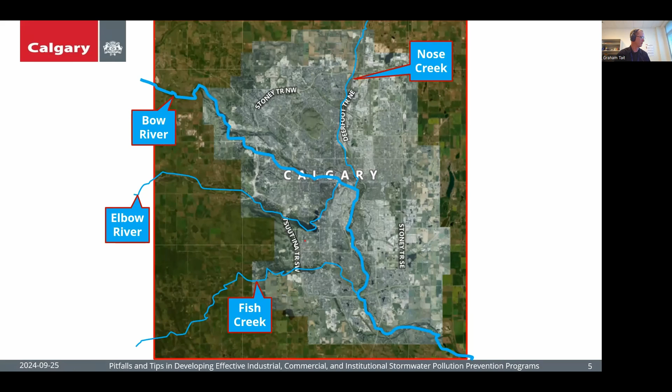We have a couple of water treatment plants. Some of you might have heard on the news that we had a huge problem here in Calgary over the summer. The big feeder main, a big water pipe that's kind of like a big artery transporting our drinking water from the plant up here in the north called Bearspaw, had a catastrophic failure. It supplies about 60% plus of our drinking water to Calgarians, as well as outlying communities.

Including the Tsuut'ina Nation down in the southwest part of the city. People really learned this summer about sustainability and how water as a resource, whether drinking water, wastewater or stormwater, is facing a lot of issues we need to think about in terms of sustainability. We used to have two, but now have a third wastewater treatment plant located along the Bow River.

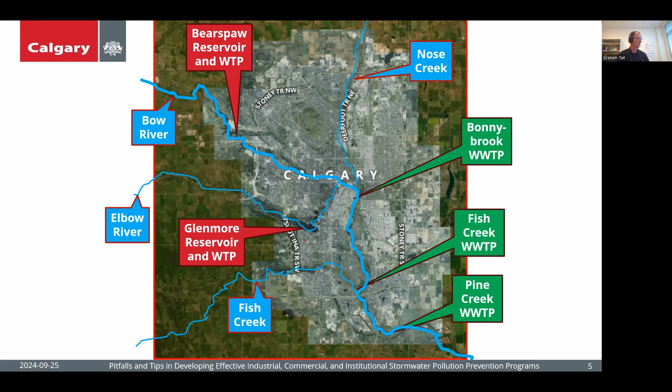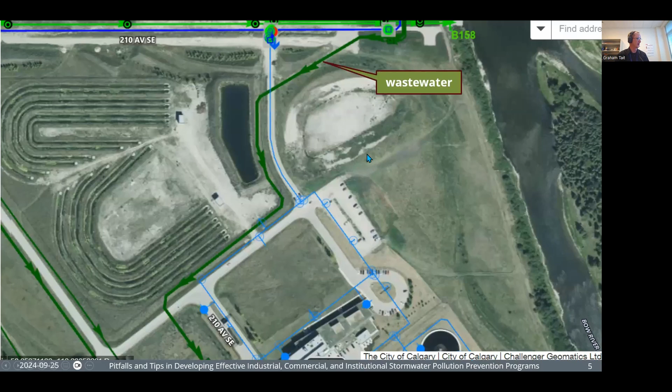This aerial image shows a little part of the north end of the Pine Creek wastewater treatment plant, which is the newest one. It's got some neat stormwater low impact development stuff like green roofs. The colored lines here I've labeled—the darker green line is a wastewater main, the big trunk that comes down into the wastewater treatment plant.

Interestingly, when this plant was built a few years ago, the City of Calgary partnered with the University of Calgary, and there's a really interesting research facility here doing a lot of research and publishing papers on things like pharmaceuticals in drinking water and wastewater. These contour-like areas you see are actually testing streams where they can look at the fate of a pharmaceutical, for instance, in wastewater. It's really interesting what's going on down there.

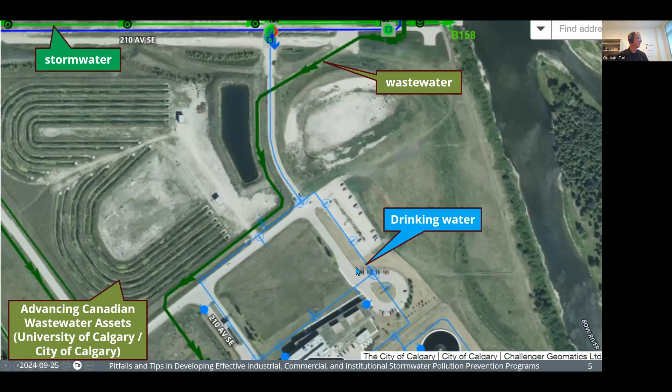This is from our geographic information system, our GIS, these layers. The blue layer is our drinking water—those are pipes and valves and so on. The lighter green color is stormwater. A lot of that stormwater flows sometimes with some degree of treatment, like a storm pond in newer neighborhoods, but in a lot of older areas it drains untreated largely to the receiving environment—in this case, the Bow River, where this wastewater treatment plant is located. But that's just an example. As the water utility, those are the three different types of water we're responsible for managing.

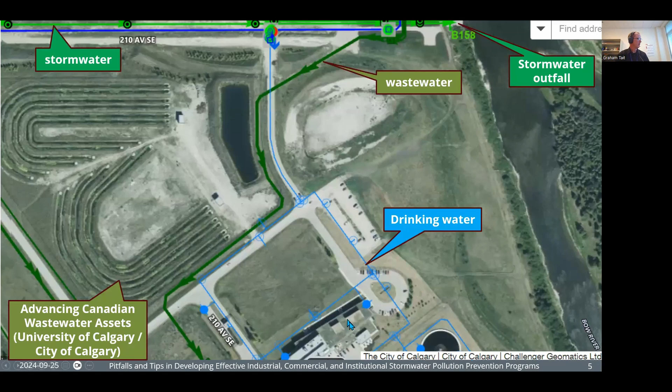In a bigger watershed context, Calgary is located along the Bow River, which flows from the eastern slopes of the Rockies. North of us, about 3 hours drive, is Edmonton, with a river called the North Saskatchewan. The Bow River combines with the Oldman River and becomes the South Saskatchewan, flowing through Saskatoon. It's important to think about stormwater pollution prevention knowing we're always living upstream of our neighbors and downstream of our neighbors—so a regional effort at a watershed scale is sometimes important.

I'm going to talk today a little bit about our stormwater pollution prevention team. As I mentioned, we provide various lines of service, including erosion sediment control. I'm going to be talking mostly about our ICI program today.

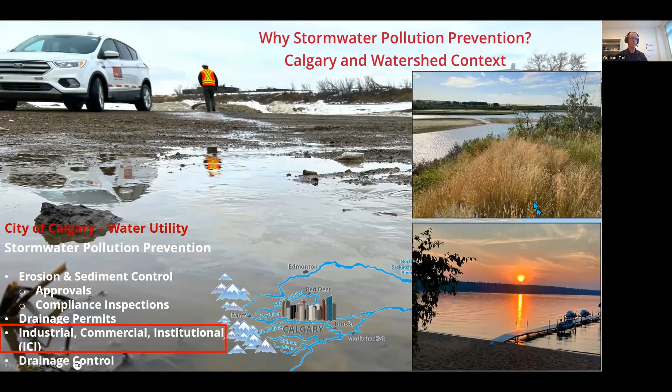Just for our friends in Saskatoon joining us, I wanted to post a couple of pictures. My wife's side of the family is from the Prince Albert area, so we go out to this beautiful lake every summer called Emma Lake, a couple hours north of Saskatoon. I did take my bike this summer and ride around the beautiful pathways in Saskatoon, and this is a view of the South Saskatchewan River as it flows through the city. It's just gorgeous. So there you go, Saskatoon folks, I thought I would make mention there.

Stormwater awareness, I think that's why we're all here. It's really important, and as Joe, one of the presenters, mentioned yesterday, it's really where we've seen some good strides in terms of sustainability.

I'm currently doing a course in environmental communication, and I've been reading this book by Hoggan called Do the Right Thing: PR Tips for a Skeptical Public, produced by Capital Books. Hoggan's website is here. It's a really interesting read if you're working in stormwater pollution prevention and trying to plan how to work effectively with industries, facilities, and colleagues in a municipality. What's key in our program is that first and foremost, the City of Calgary is doing the right thing, and secondary to that is being seen to do the right thing, in terms of having an effective program. That's my first tip of the day.

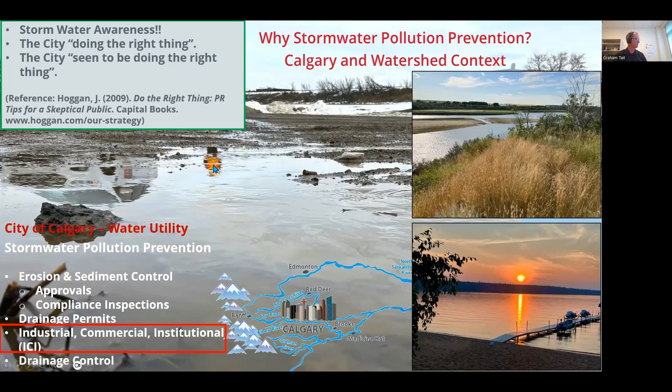The city here in Calgary, we're in part of a zone we call Hailstorm Alley. We suffer from a lot of bad hailstorms here, usually once every year or two, where one region of the city or sometimes a larger area gets hit. We had one just last month in early August, and it caused a lot of damage.

Currently, the price tag is about $2.8 billion. I'm not sure what that is in US dollars, but it's probably about 2.2 billion US dollars just for one storm that lasted for about an hour. It roared through the city and took siding off of homes and caused a lot of vehicle damage.

And once all the hail started melting, the Jasper wildfire you probably heard about too, north of Banff, north of Bow Lake is the town of Jasper, and it was partially devastated. About a third of the town was burned in a wildfire this summer. It was just awful to see.

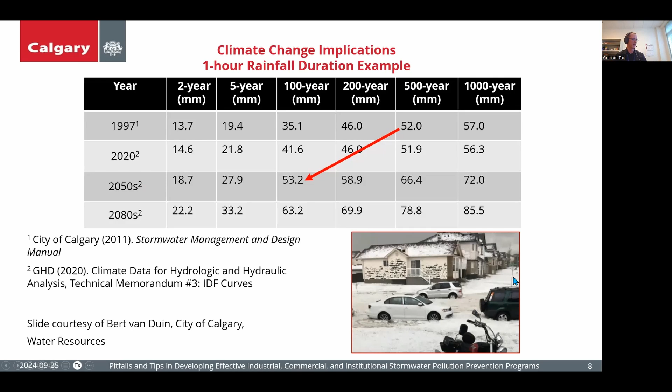So it's something we've been trying to consider in terms of our stormwater pollution prevention, our ICI work, and our erosion sediment control. We had a city group here in Calgary recently at the facility I work at - they did a climate adaptation and resiliency assessment, and the discussion about stormwater in that assessment was almost missed. Luckily, somebody said, 'Hey, what about stormwater?'

And you're getting more pollutants building up in these droughty periods, more intense rain events, and there's a lot more potential for pollutants, sediments, nutrients, and so on to be carried off into the stormwater system and downstream.

So in terms of regulations, we're really not all that dissimilar from the United States, for example, and I'm not sure where everybody on the call is calling in from today. But over the years, I've become quite familiar with the US requirements, starting with the Clean Water Act and the permitting and on down through the state and local level.

Here in the City of Calgary, we actually have an approval and authorization that's granted from our provincial government. The government of Alberta, which is our provincial government, has provincial legislation called the Environmental Protection and Enhancement Act. Since they basically oversee municipalities under their legislation, we have an approval to operate our stormwater system, our wastewater system in the city.

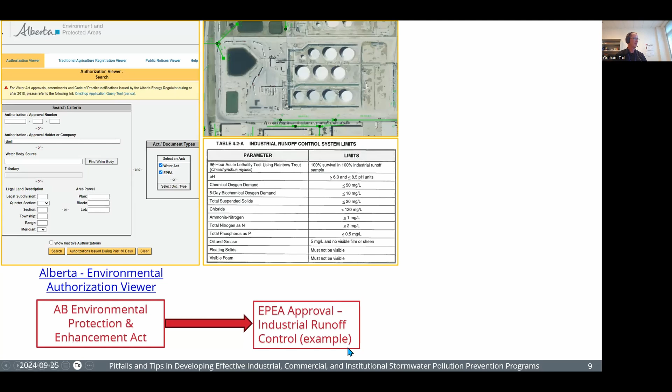We work closely with that facility and the Alberta government, but these tend to be few and far between—the vast majority of facilities do not fall under an approval, which creates a bit of a gap. One thing we've tried to do in our program is work effectively, especially with our provincial regulators, called Alberta Environment and Protected Areas.

Here's an example, a couple of photos I've added. The one at the top is where we did a joint inspection with Alberta Environment and Protected Areas at a local auto recycling facility. We were having a few problems with this facility at the time, and they've since done significant work to remove potential stormwater pollutants from getting into the storm system. At the time, they were draining all their vehicle fluids into an open tank under this car, which was a fire hazard and a real risk of pollutants being spilled and running off the site.

So we've done quite a bit of work on joint inspections with those regulators. They also have what's called the environmental hotline—a 1-800 number you can call. I call it a lot; I think they know me on a first name basis. You can report spills and that gets it into their system. They also have reporting if it's going into fish habitat, for instance.

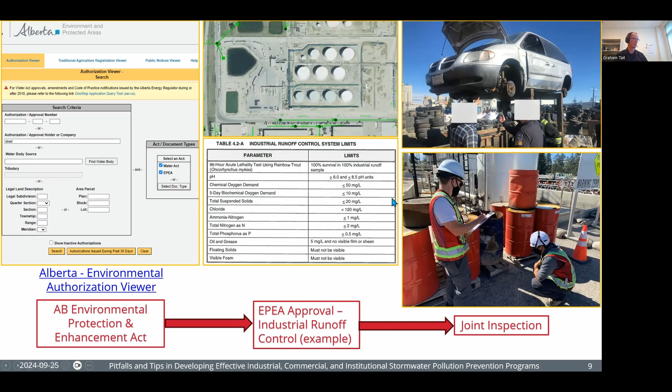They will notify the federal regulators, typically Fisheries and Oceans Canada or Environment and Climate Change Canada. They're fairly short-staffed here in the Calgary area, but we've worked with them on some joint work, so relations generally go pretty well. But I wanted to point out the difference between a guidelines-type approach and the sometimes need for standards or limits—that's a challenge we have here in Calgary, as regulators provincially and federally tend to take more of an end-of-pipe viewpoint, where it's entering the environment, which is where they're most interested.

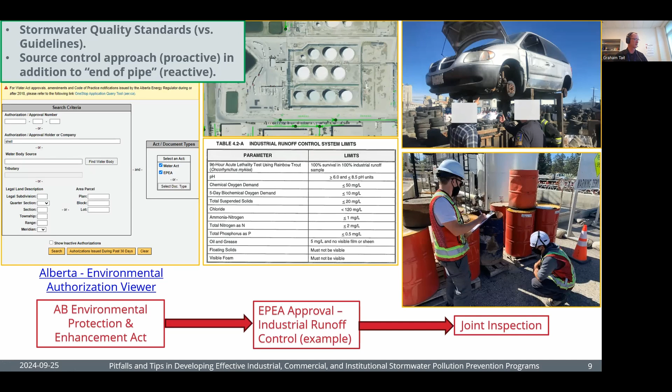So last year we finally released a strategy called the Stormwater Management Strategy, which addresses some of these issues and takes a more holistic approach to stormwater management in the Calgary area. Since this is over Zoom and turning into a YouTube video, you probably won't be able to click the link, but you can search up City of Calgary Stormwater Management Strategy. It's quite holistic, well integrated, and at the corporate level—it's not just the water utility responsible for it, we work with a number of business units and departments to implement the strategy.

Interestingly, one thing in the strategy over the next couple of years is that we're going to start requiring certain facilities or sectors to develop stormwater pollution prevention plans in the industrial and commercial world. Currently we're quite effective at that in the construction world with erosion and sediment control, but we've got a long way to go, so that's something we're currently working on, which is quite exciting. We do have a bylaw—some of you would call it an ordinance, I believe.

One of our bylaws here is the stormwater bylaw, and it gets updated every few years. We do have some wording in the bylaw, for example, that talks about the term we use as prohibited substance or prohibited substances. So anything other than relatively clean stormwater, if it conveys anything else from a site, such as high TSS, heavy metals, or hydrocarbons, we can take enforcement action under our stormwater bylaw.

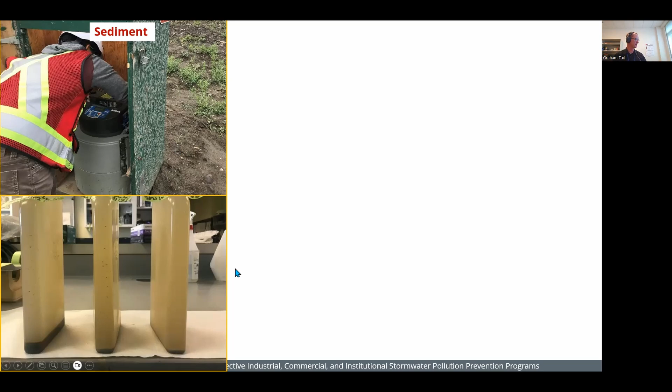So that kind of work was really effective at getting the message out.

A few years ago, if you see the photo in the top center, this is one of our oldest storm ponds in the city. It's one of these old traditional single-cell storm ponds. Somebody from our operations team called and said the pond had turned bright orange. I'm not sure how well the color shows up on your screen, but literally this pond is bright orange. There's a sign I've whited out here, an outfall sign that just shows the number of the stormwater outfall. We'll talk a little bit about that later.

We ended up having to take this water and test it quickly for toxicity to send it to one of our wastewater treatment plants as an emergency. It passed for toxicity, but we definitely didn't want this water draining out of the pond into the environment. After much work going up the branch network of the stormwater system, we determined there was a metal plating business with all kinds of lack of best practices, hidden drains under tanks and so on. Lo and behold, they had a discharge of acids and heavy metals—a lot of chromium and nickel in this water. So it was a bit of a disaster, and we did the best we could to get it under control.

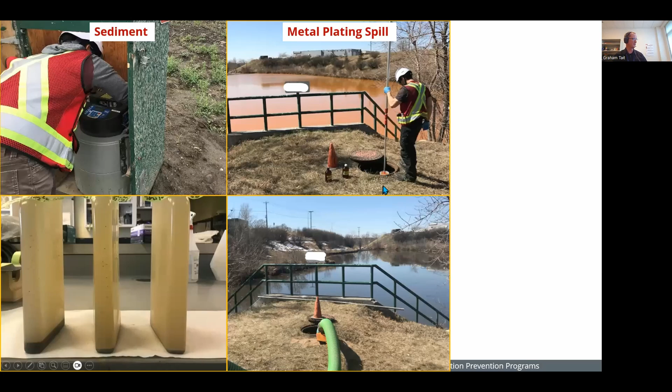If you join our session on Friday, there's a colleague joining me, Reed, who's going to talk a little bit about microplastics.

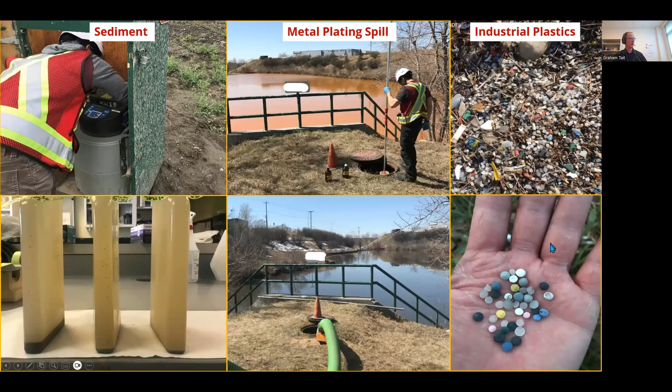Some of you in big urban areas have probably seen these plastics, especially if you have what Calgary does—a plastics industry, with companies that take fossil fuels and turn them into polyethylene pellets and resins, part of the linear production chain of making plastics. If you look at these little microplastic pellets—I think the Aussies call them nurdles—they really easily get into the stormwater system. They're like little ball bearings that float and bounce along in the stormwater.

And lo and behold, they end up downstream. This is an example near an outfall that's literally inundated—you can see all these multicolored microplastics. We had a huge problem with that. All these examples are pretty good visual examples of stormwater pollutants, but of course there are also a lot of invisible pollutants, dissolved metals, and other constituents that can get into stormwater. These are nice to show on a presentation, but raising awareness about stormwater, and what all of you are doing this week, is really important, as well as wet weather inspection, getting sampling incorporated into facilities, and making sure they have best practices.

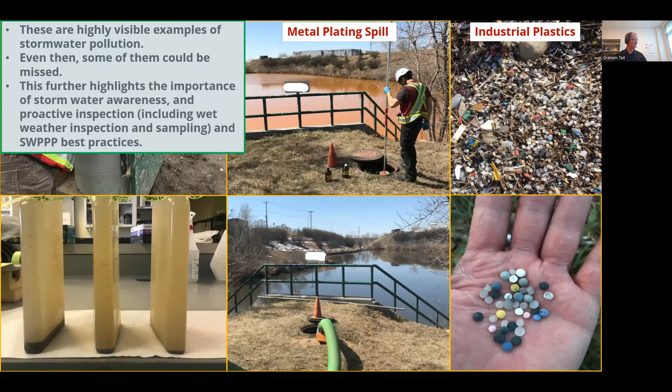The good news with that industrial plastics example—at the end of the slide, this is what it used to look like. We went upstream and discovered plastics manufacturing facilities with a lack of any kind of practices whatsoever. You can see the photo at the top left, for example, the middle of the railroad tracks coming into the facility is absolutely covered in plastic pellets. Some of the other photos demonstrate the same thing.

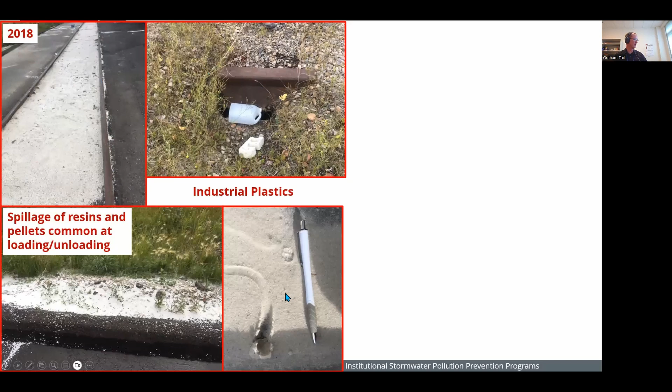So we brought it to the attention of these companies and told them they were going to be fined under our stormwater bylaw. We also got provincial and federal regulators involved, and they have some pretty large fines—you could be talking $1 million plus a day for these microplastics getting downstream. The companies quickly got on board, and as it stands today, they've got some of the best stormwater pollution prevention practices of any facilities around the city.

I put a couple of slides here on the right-hand side from 2023, from some inspection work last year around rail cars, showing good signage and good cleanup. There's also a local, provincial nonprofit called the Alberta Plastics Recycling Association that stepped in and was really helpful. They had ownership at the time of a program called Operation Clean Sweep, which some of you might have heard of—it's a worldwide program used in a lot of developed countries to deal with plastics pollution.

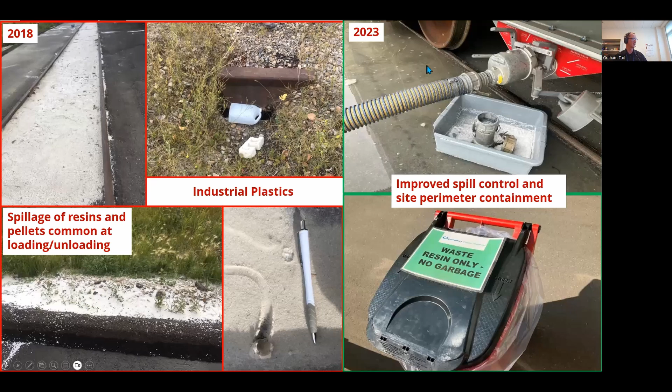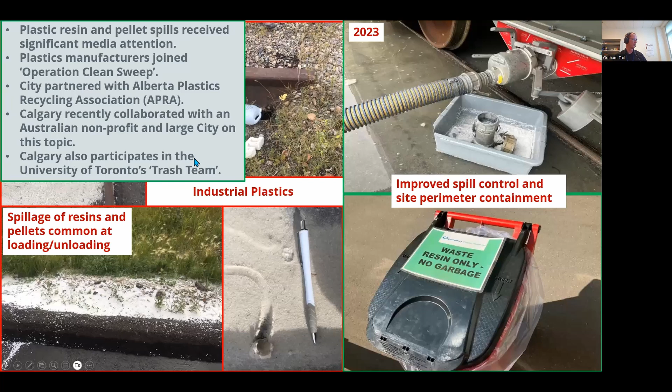We also did some work last year with a large city in Australia, as well as a microplastics pollution nonprofit there. One of the researchers got a hold of us. It just goes to show that we've all got similar problems, and when we work together, we can really make a difference.

We also do quite a bit of work here at our city facilities. The example in the photo is a bin used for hazardous waste disposal from some of our fleet maintenance facilities, as well as the fire department and other field groups that go out and do spill cleanup, for example a bus or garbage truck with a hydraulic fluid spill. The material is bagged and brought to this bin for hazardous waste disposal.

I don't have a photo of the old bin, but it used to be a little scary. It had large, heavy plastic lids, and 90% of the time the lids would be open. So when we had rainfall or snowfall, water would accumulate in the bottom, and if the bin wasn't completely watertight, it would leak out with all the other contaminants.

So we did quite a bit of work and discussion, a relatively low cost thing in the grand scheme of things, to replace this bin. I love this bin now. It's got great signage and a soft close lid. I wanted to open the lid to take a photo, but the lids are always closed now. So you've removed a source of stormwater pollution getting into the bin.

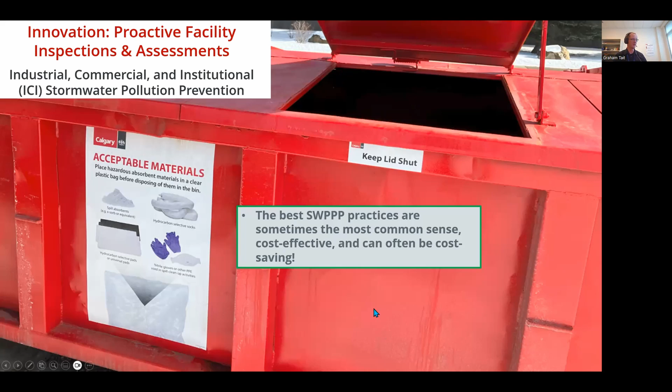In part thanks to the US EPA, we found some great information as we were trying to develop our content here at the City of Calgary for our ICI program. A lot of these concepts, like keeping a tidy site and minimizing exposure, are taken from ideas from the US EPA and even state and local level presentations like the ones you see this week. There's really a lot of good messaging on that.

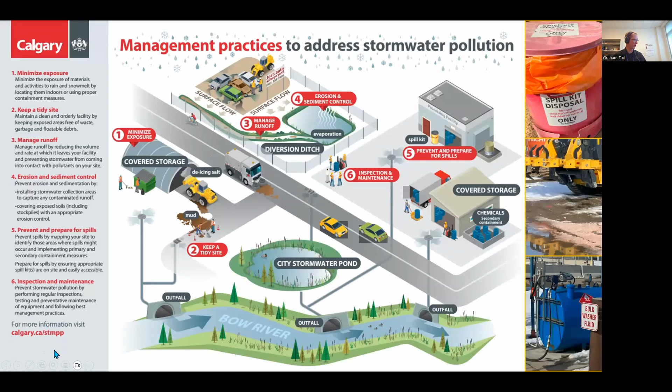And as the old saying goes, a picture says 1,000 words. So we prepared this and put it on our website, which I've got a link to a little bit later. There's a QR code you can click on, or also calgary.ca/STMPP, Stormwater Pollution Prevention. We just wanted to do something different.

So thanks to the US EPA and to all of you really for delivering stormwater awareness to such diverse audiences as we deal with.

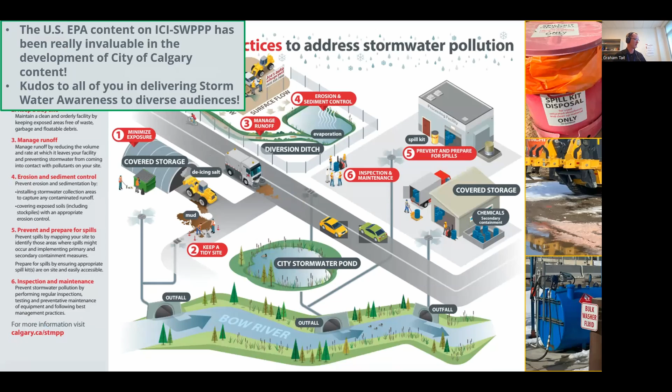Also a special thanks to Jonah Sonner - I really love this presentation, just give a little plug for it. It's back from 2016, so a few years ago, I'm not sure if there's an updated one, but I actually heard about this Stormwater Awareness Week through my friend John McCullough in California, and I started signing up for these sessions as much as I could every year. It's a small world, and it's really cool to connect with all of you.

I took some of the concepts Jonah explains in his video from 2016 and applied them to one of our local facilities just next door to me here. They built a new facility a few years ago called our salt management facility. Calgary's a winter city, and we use a lot of salt, though we try to be fairly judicious in how we use it.

Nonetheless, it's one of these balancing acts between public safety, driver safety, and stormwater pollution prevention. In fact, this facility used to make a product they would store outside that used to drive me crazy, called pickle - it's basically a pickled sort of gravel material, pickled with about 10% salt.

A lot of the material they use on the roads is what we'd call pea gravel, a small gravel about the size of green peas, maybe a bit smaller. In order to stop the piles freezing and to have salt in the product as a snow and ice control material, they add salt, and they used to store it all outdoors.

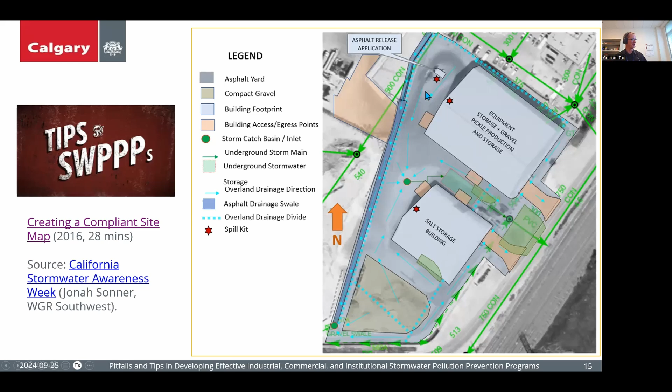Like I said, I love the video by Jonah Sonner, mapping your site and creating a compliant site map. We take quite a bit of this, as well as some of the US EPA stuff. Now we have a tool on our website where people can create their own site map and build it into a SWPPP, basically. How are we doing for time?

I better speed up here.

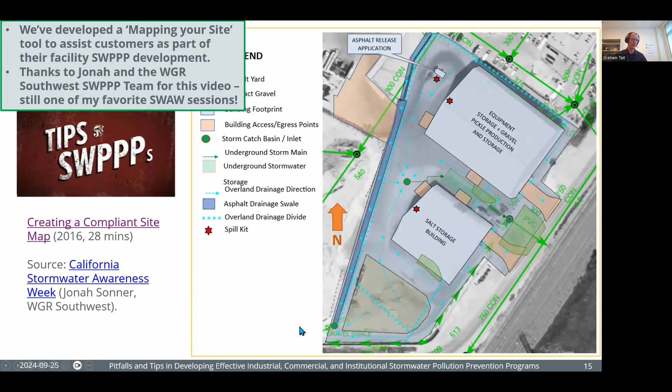We'll learn a little bit more about this type of pond. It's a multi-cell pond that also incorporates some nature-based elements like wetlands and so on, and it's literally capturing a lot of pollutants that were going directly into the Bow River before.

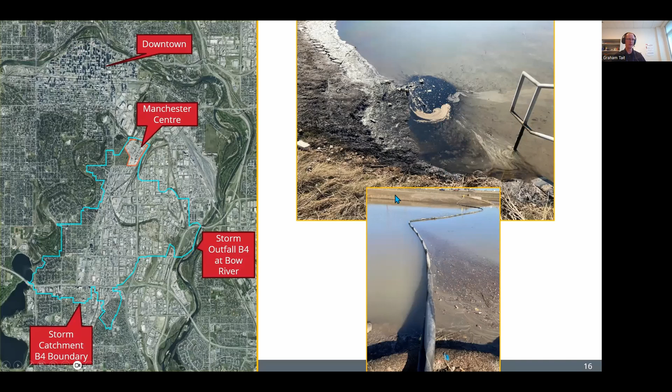So back in the spring, we had this oily substance. We took samples, and it turned out to be motor oil. It led to a whole project that my colleague Parker and I did through the summer here.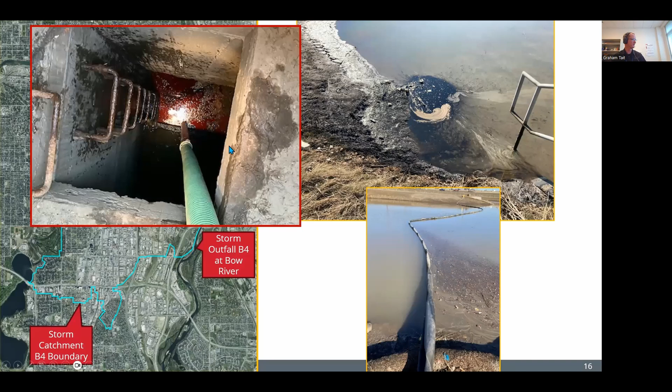One day back here in the summer, it was filled with this red colored substance. The first thing I thought of was Breaking Bad, but I guess maybe fortunately it didn't turn out to be that.

These are the samples we submitted to our lab, where we have an awesome accredited lab that's part of our division here. They did all the analysis on all these different models - you can see the product floating at the top of this 4-liter plastic jug here.

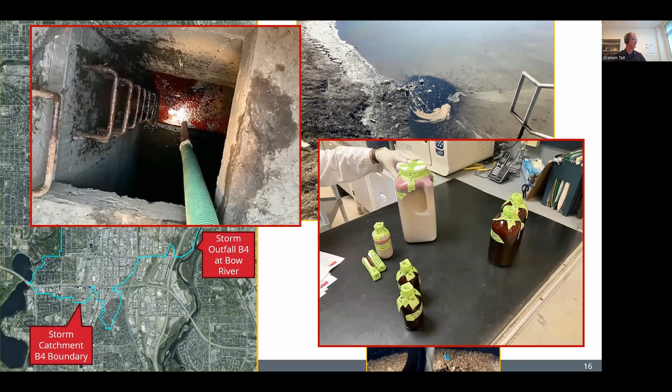I came back to the office after our spill response, and I wondered what that was - transmission fluid, power steering fluid? We have a state-of-the-art open scan GC mass spectrometer at the lab that runs the analysis, referencing a library of possible products and chemicals, and sure enough it came back as transmission fluid. That raised the ante in terms of trying to find the problem here.

One thing we used effectively, as I'll explain, we went around a lot of these automotive facilities. At first people were sort of blasé, they weren't really that interested. What's the city doing here? What do you guys want now? We had an inspector here from the fire department last week.

So what we did was we took some of these photos and laminated them, 8.5 by 11 size photos, and brought them with us. So when people would ask, 'What's the purpose of your visit? We have good practices here, we're not causing any spills or anything,' we would show them the photos, and then we would use this saying.

I don't know where it originated, but I learned it from Dwayne Stenlund with Minnesota DOT. He's an awesome guy, I love Dwayne. It's basically, who wants swimmable, fishable, drinkable water? Dwayne does a lot better job of it than me. Raise your hand if you want one or more of these. We got people thinking, in the auto sector at these facilities, about what kind of impact they might have.

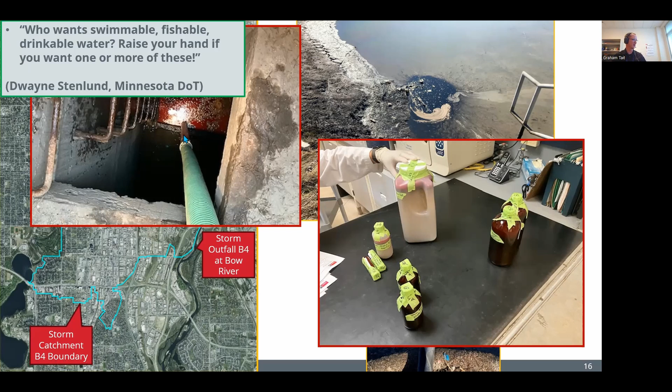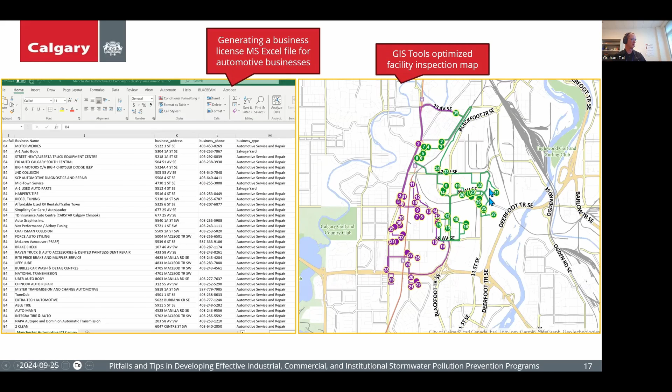So what we did was we went around and mapped a bunch of these facilities. We used our city business licensing data and looked up automotive facilities. It wasn't 100% effective, but initially we came up with a map, and I think Parker was going to cover these purple ones here, and I was going to go out and look at the green ones. That's kind of how we had it set up initially. The data wasn't maybe 100% accurate.

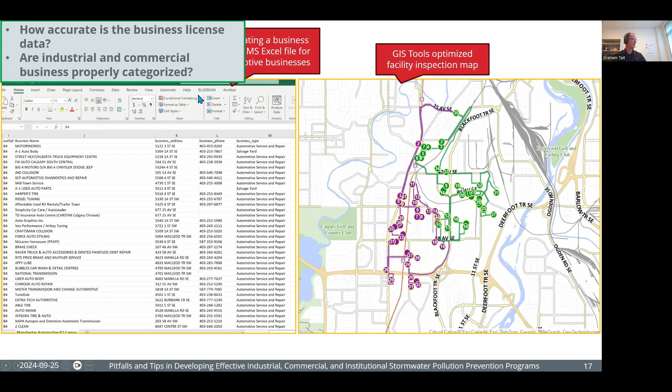But then we also used this tool called pictometry. We have this awesome tool in our GIS system. There's a company called EagleView that I'm assuming a number of cities use a service like this or similar, where they fly high resolution aerial imagery. The incredible thing about this imagery is it gets updated, they fly it every year. In fact, I think this is September 25th, 2023. Exactly a year ago, this image is from, they might be out there today flying new images.

The cool thing about this is you can click on this little compass and get this oblique image where it's looking at a 45-degree angle, and you can change the direction north, south, east, west. So Parker and I started doing this kind of work, doing a little bit of an initial assessment. Oh, it looks like there's an automotive facility here. It looks like they've got some outdoor storage. What is going on here?

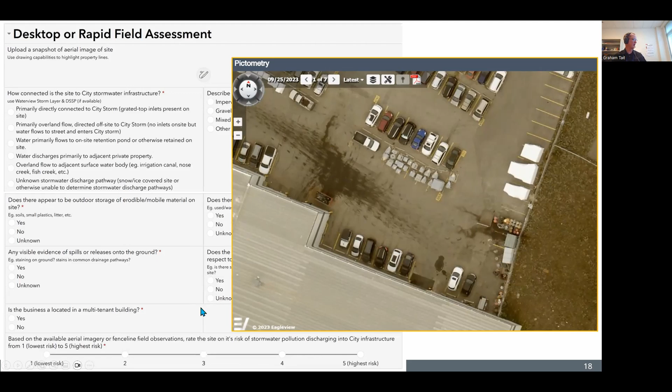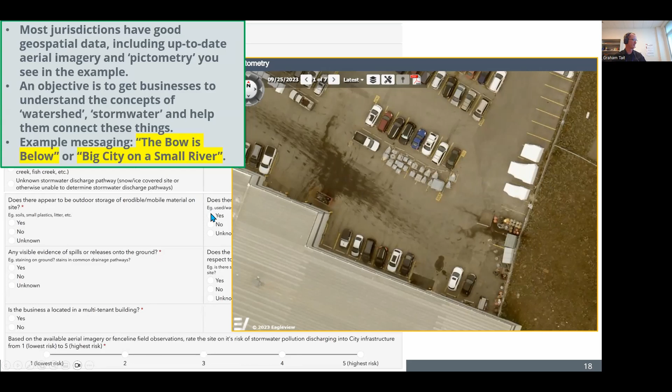It looks like a lot of drums with some potential spills. Then we can look to see what access they have to our stormwater system. So we did this kind of pre-assessment work, and then we went out there and used the laminated photos to explain to people if they weren't really buying our story right away. We framed it using some city language, the Bow River, terms like the Bow is below, or we're a big city on a small river, getting people thinking about swimmable, fishable, drinkable water.

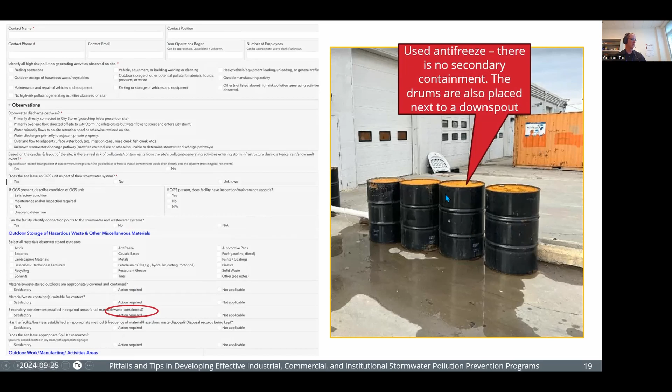We went out initially as we were building our geospatial database and started doing these inspections. At this facility, we found four drums full of antifreeze with no secondary containment. That was a good conversation, and the company ultimately, very quickly, got into compliance by moving them into a covered, secured area with proper spill trays.

I have to give Parker most of the credit here, and I see he's sitting in the background. He did a lot of work over the last couple of years to develop these geospatial tools for us, using Esri basically as the GIS platform, leveraging existing data sets we have in GIS technology. The work Parker did initially was to develop it for our erosion and sediment control, our construction SWPPP program. We've since made really good progress in terms of development and implementation in our ICI inspection and compliance program.

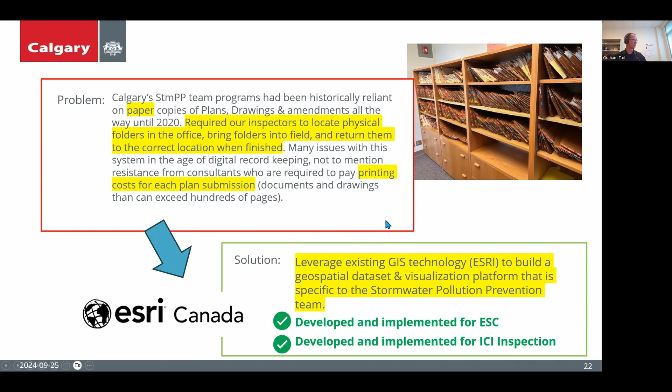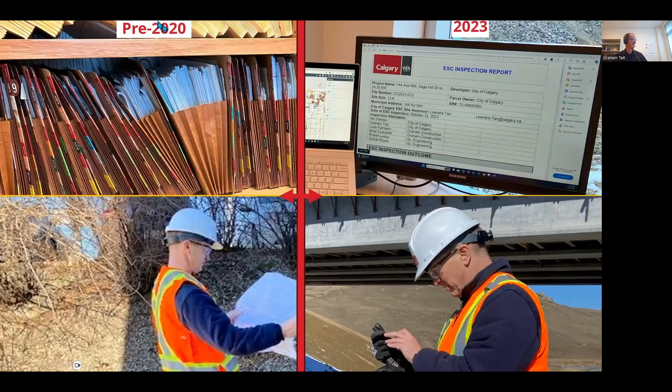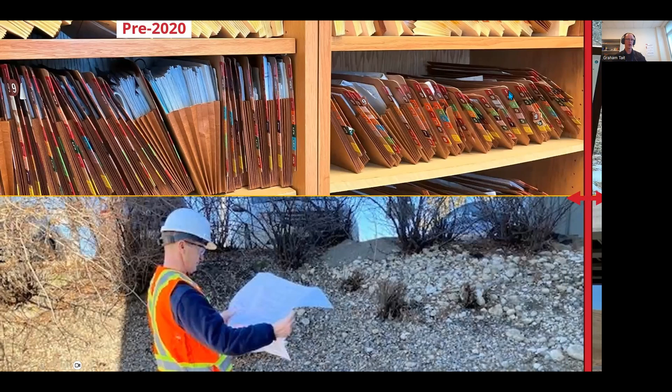This is a slide I put together. This is me here on a better day, in terms of our erosion sediment control back pre-COVID, I guess, if we want to use that timeline. Prior to 2020, we used to have all these paper files. Our office still has quite a few of these - these are all erosion and sediment control, or construction SWPPP plans. Why we generated a lot of paper, and anytime we would ask for a change to a plan, more paper was produced, and then we would bring the paper out to site with us.

Post-COVID and through COVID, we started working on this geospatial system where we've gone much more digital now. So we can go all the way from reviewing an erosion sediment control plan right through to inspections as the project is developed, and tracking those inspections, and it all goes into one database. I'm not sure how many of you are using something similar - there's probably quite a few of you out there who are.

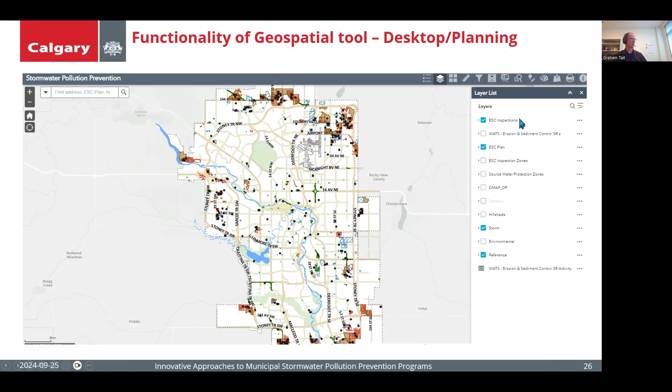I just put up this image real quick for ESC, erosion sediment control. You can see these shaded areas - these are all shape files put in by our staff as we get plans in. Of course there's quite a bit of development in terms of subdivision development around the periphery of the city, especially in the north and south ends here. There's quite a bit of rapid growth going on. So you can basically open up all these layers on this mapping tool.

And this is just me out on site doing an ESC inspection. I felt like they could have used some more slope breaks here for sure, folks. You know, the hydroseed application - this is at the tail end of winter, everything looks really brown in Calgary at that time of year. Pretty good hydroseeding application and some blanket down here, but yeah, what's going on with the slope breaks? I don't know.

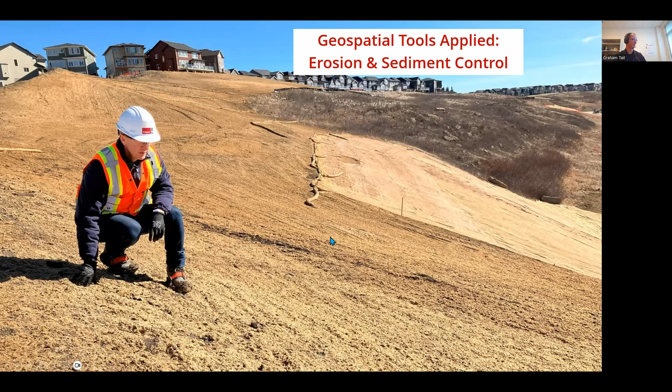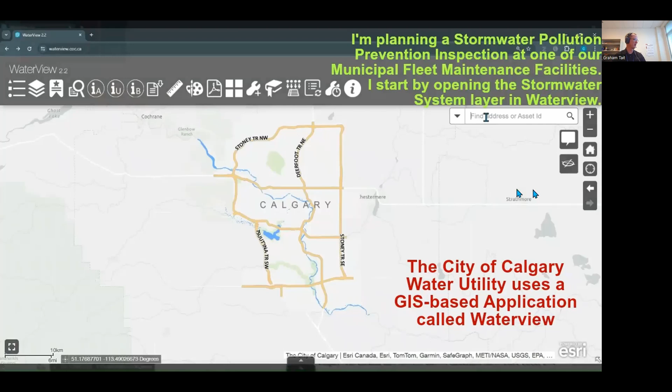So what we did briefly in the last few minutes, I'll send this to John. This is really the last slide here - I don't think it's going to play well anyway because we had some problems with the sound, but what I'll do is just send this to you guys via YouTube. It's just an example of how we took that approach and applied it to doing inspections. I would have to go through it all and fix the sound, so I'm going to try to skip it and jump to the summary.